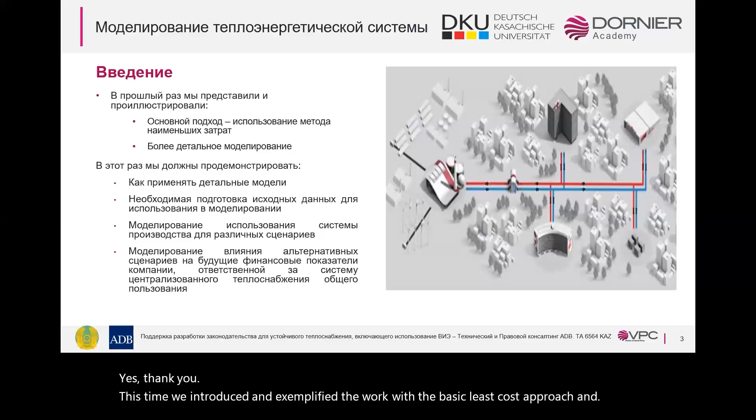Yes, thank you. Last time we introduced and exemplified the work with the basic least cost approach and showed a little bit more detailed simulation models too.

Today, we are going to go a little bit deeper into modeling of heat system and with focus on long-term planning, not for daily operation. That's important.

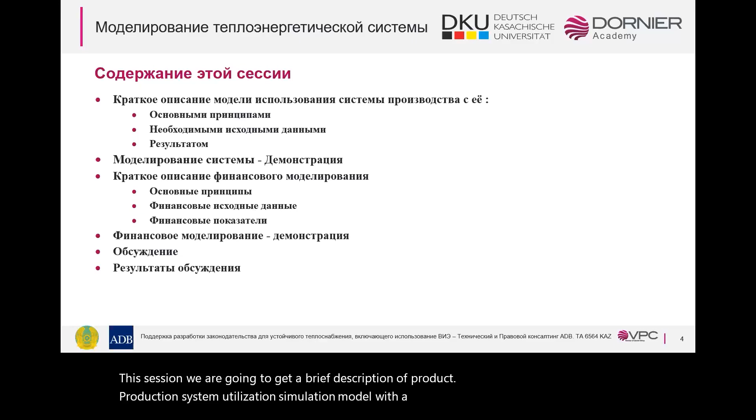So, this session, we are going to get a brief description of production system utilization simulation model with the basic principles, the necessary input and the output. We're also going to have a brief description of financial simulations, basic principles, financial input and financial performance.

After that, we're going to have a discussion as yesterday. And then if anyone wants, we will try to have a little demonstration too.

If we start with a production system utilization model, the utilization principle is that the units should operate in merit order. Then we are going to do a stepwise simulation.

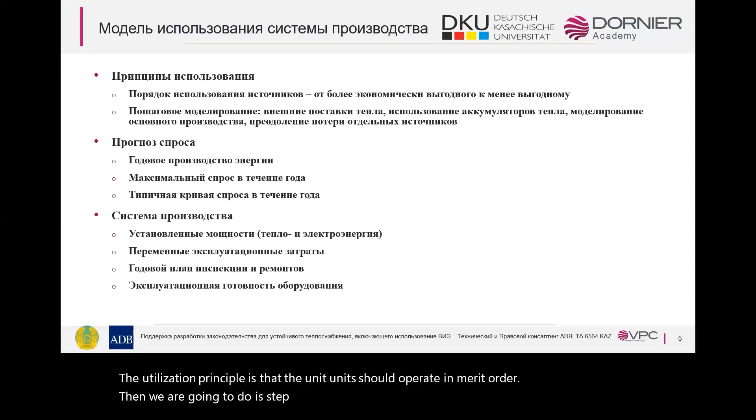And if we go to the input, we have two things: the demand and the supply. For the demand, we need a forecast of the annual energy, annual maximum demand, and the typical annual demand curve. When it comes to the production system, we need to have all installed capacities, of course, both for heat and electricity. We need to have all the efficiencies and so on, which is connected to these units.

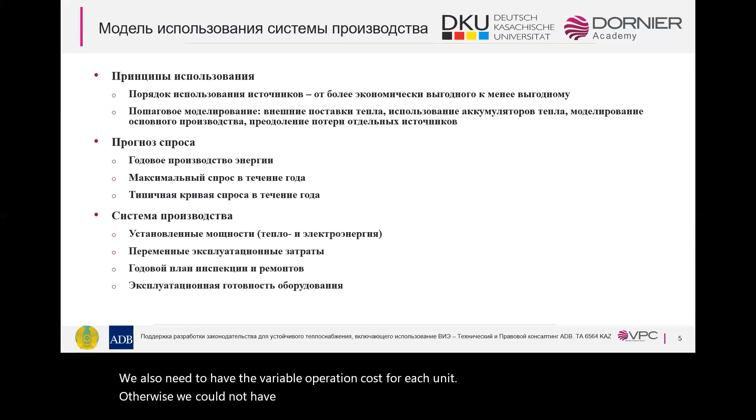We also need to have the variable operation cost for each unit. Otherwise, we could not have them in merit order. We should have an annual revision plan for the units for each one of them, and of course, the expected availability for those units.

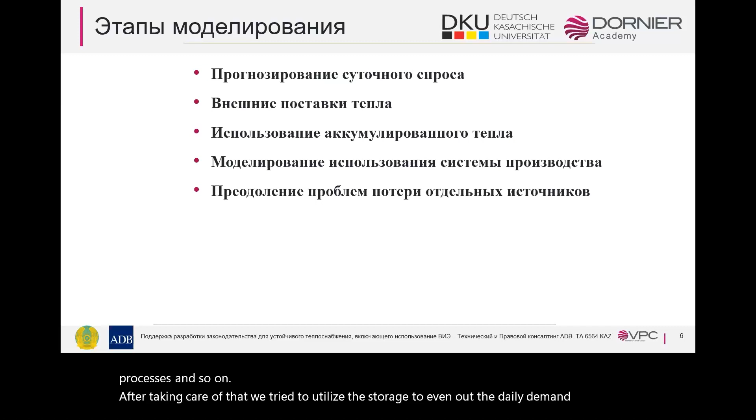Then we come to the simulation steps, and we start with a forecasted daily demand. We have the external heat deliveries, which is waste heat from industrial processes and so on. After taking care of that, we try to utilize the storage to even out the daily demand as much as possible. Then we simulate the production system utilization.

We make a preliminary simulation, and then we treat the unplanned unavailabilities.

When it comes to external heat deliveries, we usually do it very simply. We start with a daily demand curve, the daily demand, and reduce it with the external supply. Then we have the remaining demand to be covered by our system.

The storage is a special thing. You can use it in many ways. You can use it as spare capacity, of course, that's usual. But the main thing we have it for is to try to even out the demand between different days.

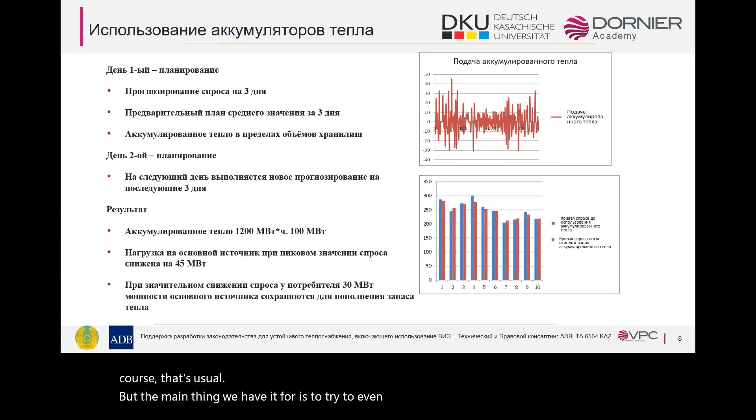The usual thing is that we make a forecast a few days ahead. In this case, we use 3 days. Then we plan for this demand as it's expected to occur over those days, the average of these 3 days. If the actual demand is higher than that, we take out energy from the storage. If it's lower, we add energy to the storage. Then we check if the storage is within its limits, of course. Then we come to day 2, we make a new plan with a new 3-day forecast, and so on.

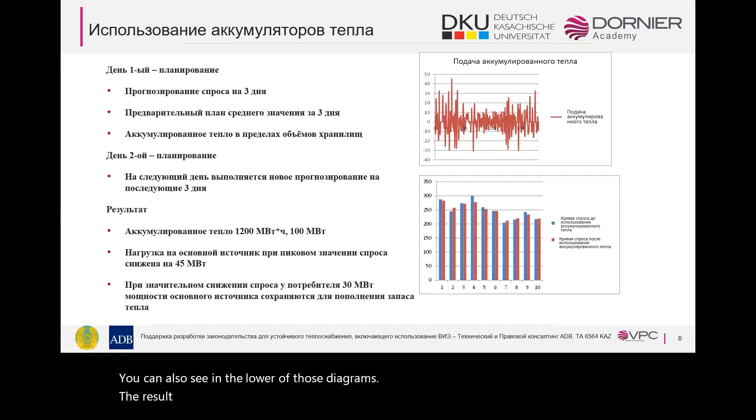In this example, as you have in the diagrams, you can see how the storage is used. You can also see in the lower diagram the result, the outcome, and the peak is reduced by 45 megawatts, and the lowest demand is increased by 30 megawatts. Remember, this is just an example.

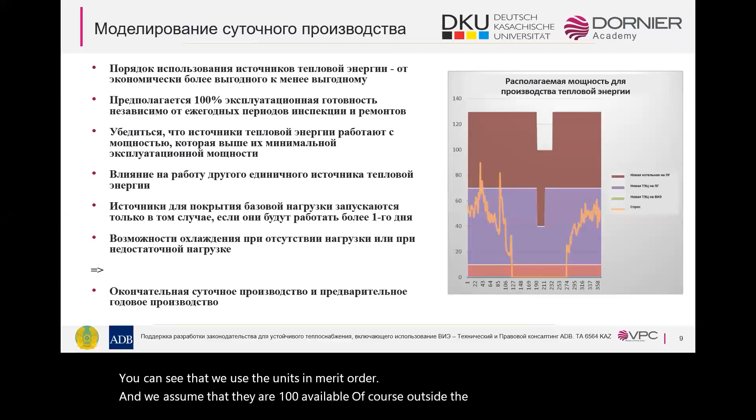When it comes to the daily production, you can see that we use the units in merit order, and we assume that they are 100% available, of course, outside the revision periods. If you look at the diagram to the right, you can see we have added the units from the bottom, and we have taken away the annual revision periods.

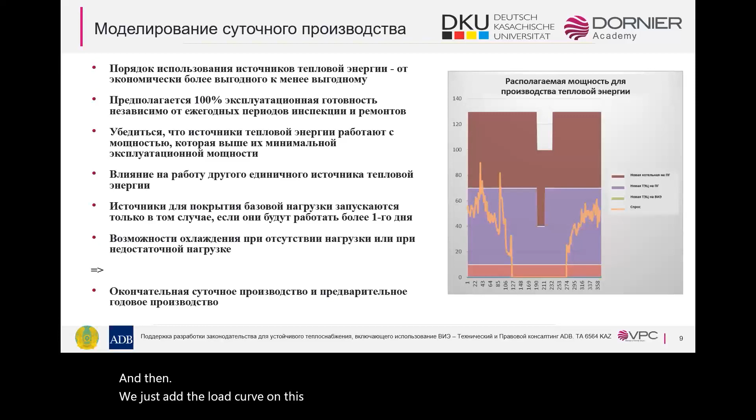Then we just add the load curve on this diagram, and then we get the daily production in principle. This is the preliminary, very preliminary thing.

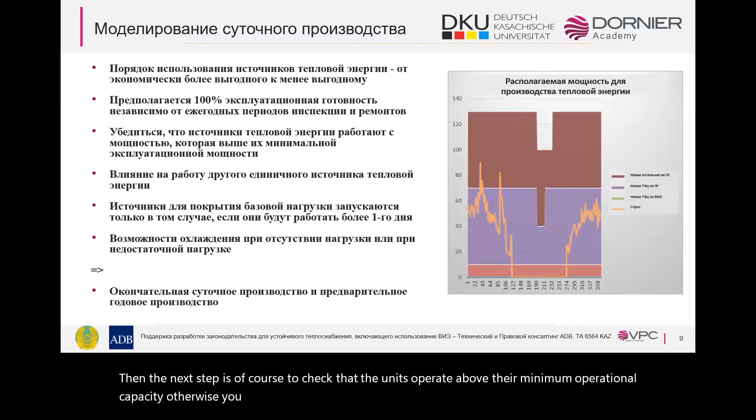Then the next step is, of course, to check that the units operate above their minimum operational capacity. Otherwise, you can't operate them. We also have to check if these units are dependent on operation in another unit, and that could be a flue gas condenser, of course. The flue gas condenser is, of course, dependent on the unit which it gets the flue gas from being in operation.

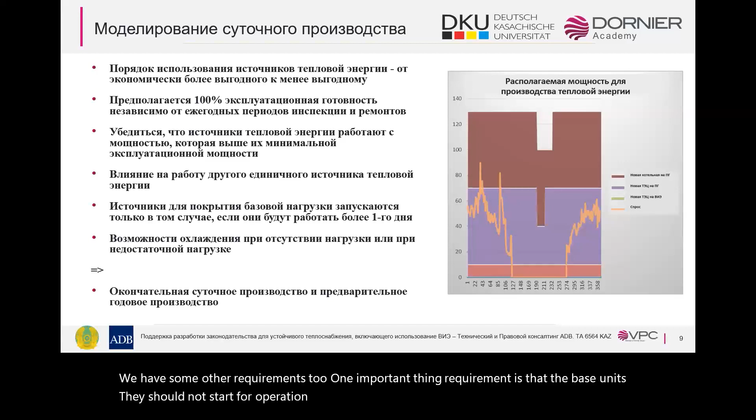We have some other requirements too. One important requirement is that the base units should not start for operation just one day or a few hours or something like that, because it takes too much time to start them and it's too costly to start them. You can also keep some type of units in operation by cooling away the heat, if that's necessary to keep it in operation.

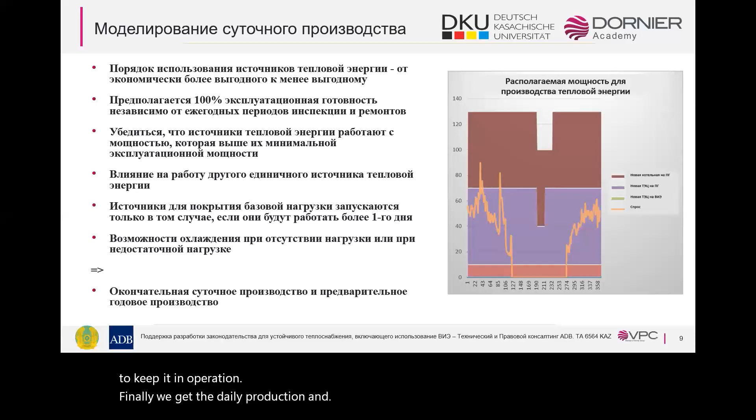Finally, we get the daily production, and we do that for every day and for every year of the simulation period. Usually we simulate 20 to 40 years.

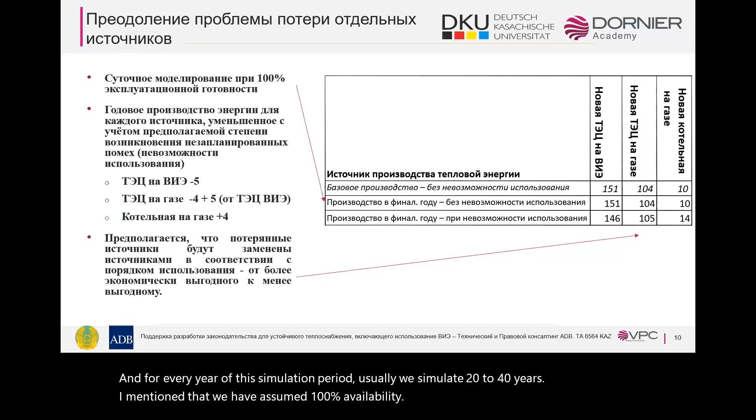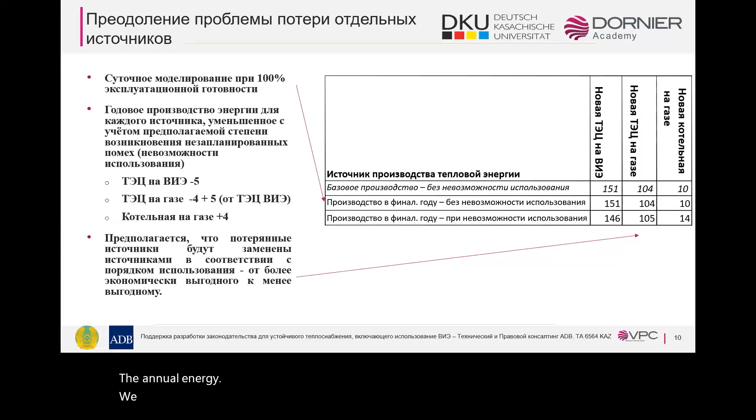I mentioned that we assumed 100% availability outside the revision periods. If you go to the second row in the table, you can see the preliminary production there. Then we should take away the annual energy that we assume is lost depending on unavailabilities, unplanned unavailabilities. In this case, you can see the CHP on renewable fuels, which we have in the table. Preliminary, we had 151 gigawatt hours during a year, and taking away disturbances and so on, we will end up at 146.

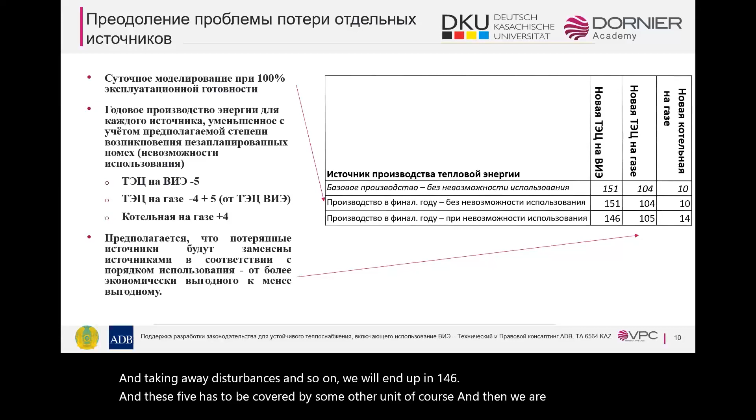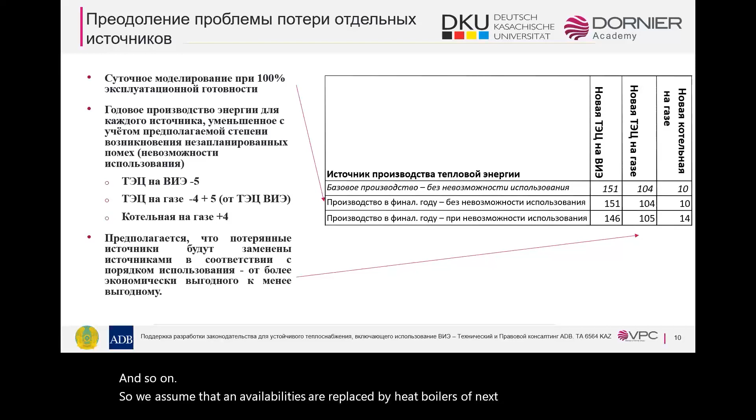And these 5 have to be covered by some other unit, of course, and then we are moving that to the next one in the merit order step. For the next one, we get 5 more to produce, and we lose 4 dependent on unavailabilities in that unit, and so on. So we assume that unavailabilities are replaced by heat boilers of the next step in the merit order. This is, of course, only done on an annual basis.

We should look a little at the input sheets, or at the input. We have a demand forecast, and that should be annual energy, annual maximum demand, under what we call normal conditions. We should have an annual demand curve, and we should use a curve with typical daily values. We use the same curve for all the years; we just adjust it to the annual energy and the annual maximum demand.

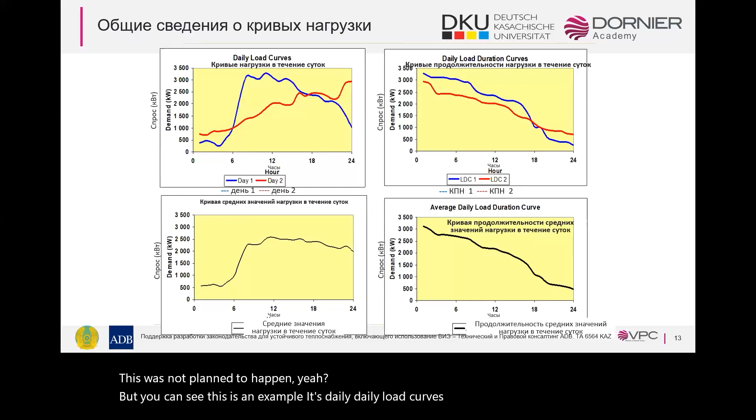We can simulate for normal years, warm years, or cold years if we want. We go to the problem with the daily load curve. Here's something, this was not planned to happen, but you can see this is an example. It's daily load curves, this taken from electricity, but it's the same principle. You see the first diagram, we have two daily load curves. To the right, we have the load duration curves for those two.

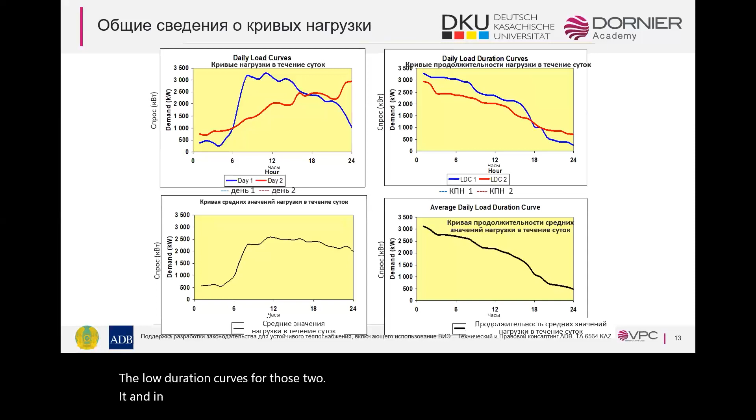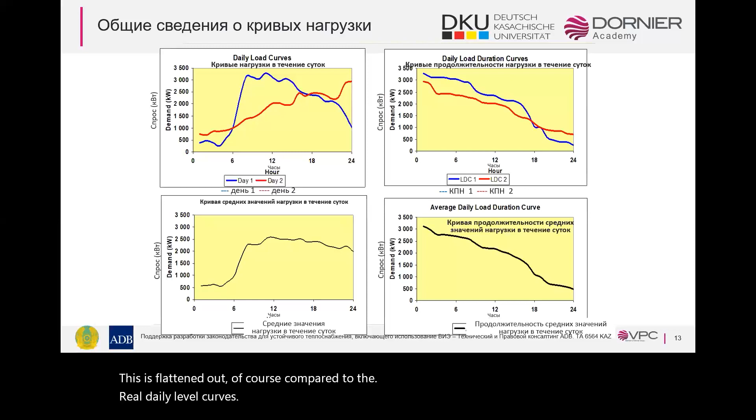And in the bottom left, we have an average curve of those two daily load curves. As you can see, this is flattened out compared to the real daily load curves.

If we go to the diagram on the right in the bottom, we have the average of the daily load duration curves. This tells us a lot about the typical demand levels, the expected levels, the differences between max and mean, and so on. But it doesn't say anything about when the different levels occur.

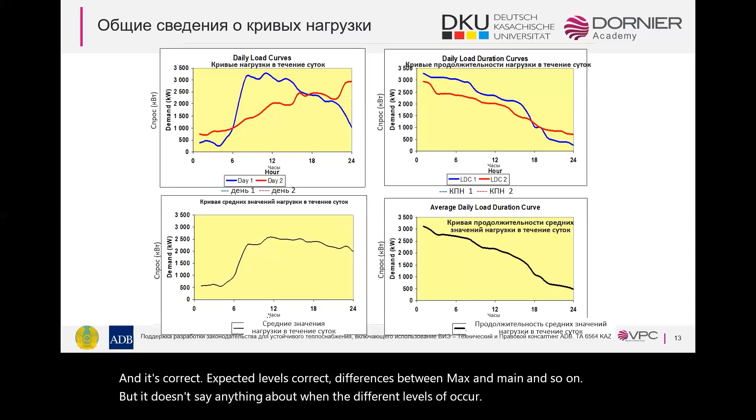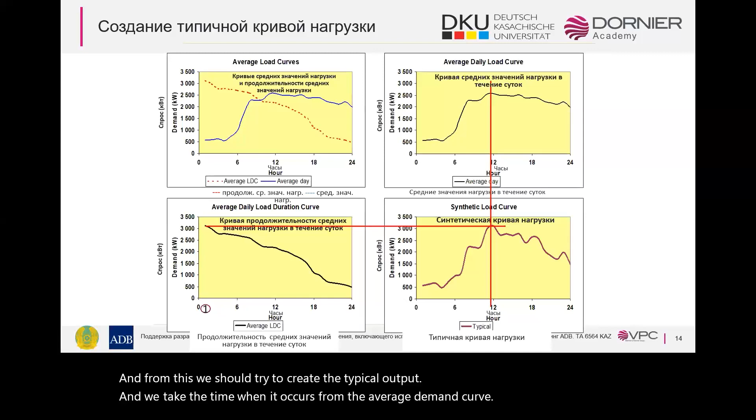Instead, we look at this. Here we have the average load curve on top to the right, and we have the average load duration curve in the bottom to the left. From these, we should try to create a typical load curve. We take the time when it occurs from the average demand curve, and we take the value from the average load duration curve, and by that get a typical maximum demand at the time when it's expected to occur.

And then we do the same for every hour during the day, or every hour during a year, and so on. So the curve to the right in the bottom shows a typical load curve, what we call a typical load curve.

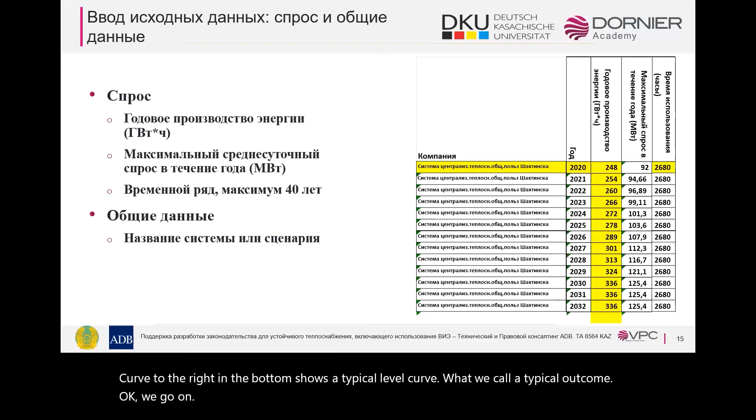Okay, we go on. We come to the demand. We should have a time series for all the time, and you can see here in the diagram we have the annual energy in the yellow column. We have the annual maximum demand, and we have the annual utilization, assumed utilization time too. We also had the name of the scenario and so on in this sheet.

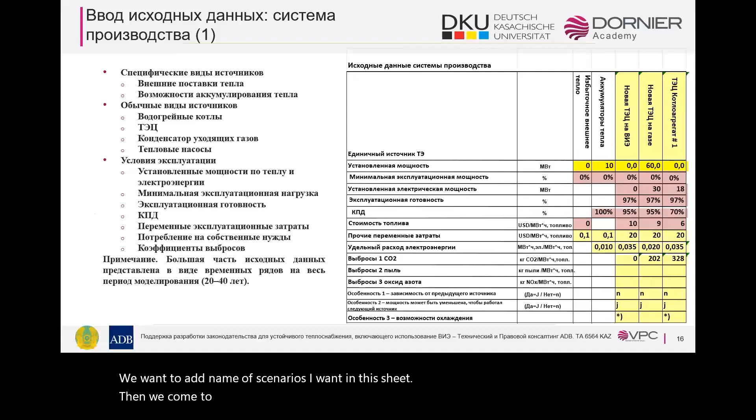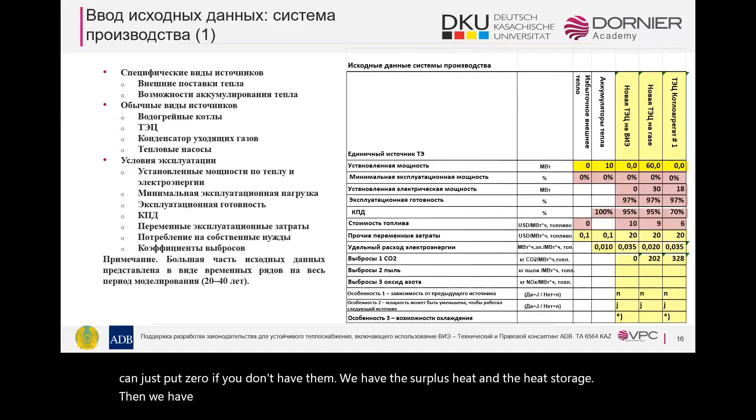Then we come to the production system. We can say we have first the units. You can see we have two types of locked units, which you can't change. You can just put 0 if you don't have them. We have the surplus heat and the heat storage. Then we have more general types of supply units: heat boilers, CHP, flue gas condenser, heat pumps, and so on. You can see this on top in the table.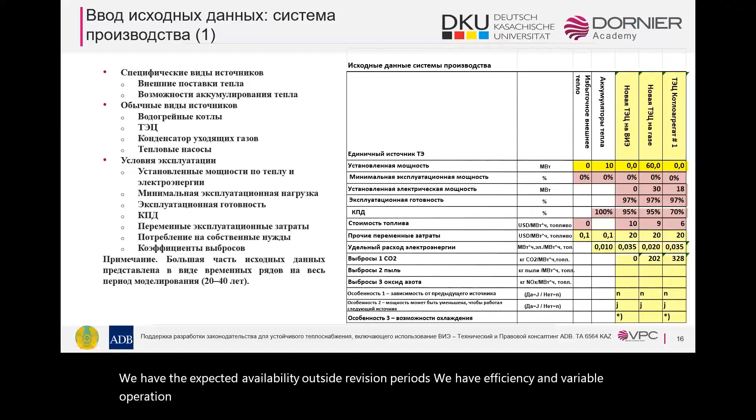Then we come to a lot of, what you'd say, operating conditions. We have the installed capacities for each one, heat and electricity. We have the minimum operational load, usually in percent. We have the expected availability outside revision periods. We have efficiency and variable operation cost, and so on, emission coefficients also. Most of this input is given as time series, but not all of them. We have a little bit more input for the generation, for the production system.

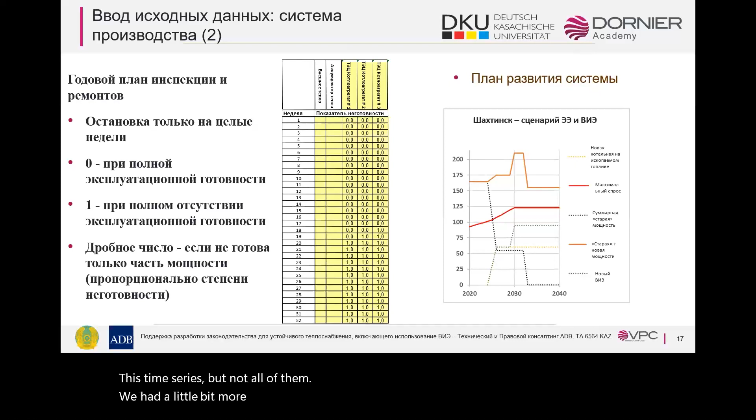We have the annual revision plan, which is rather important. You can see that in the first table, where 0 means that the unit is fully available, and 1 means that it's in revision, not available at all. This is done for whole weeks only.

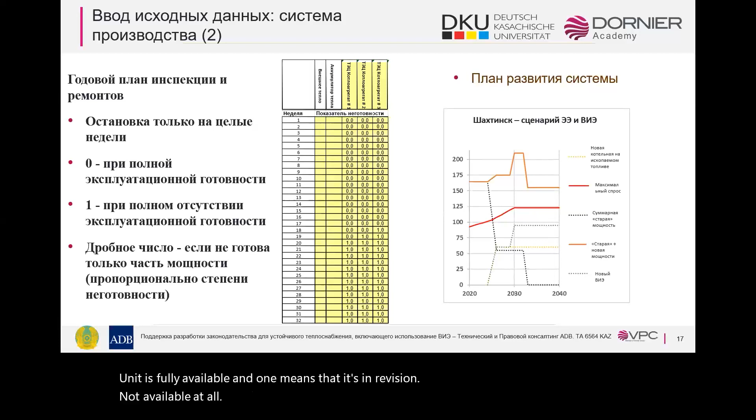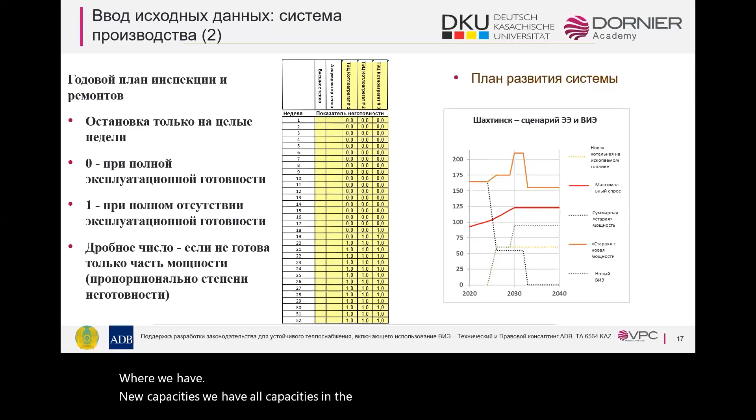We also have a system development plan, which is exemplified in the diagram to the right, where we have new capacities. We have all capacities in the system. You see when the line goes down, then we are reducing the capacity, taking away, retiring old units and so on. And we have increasing, and that's new units. That's what it describes.

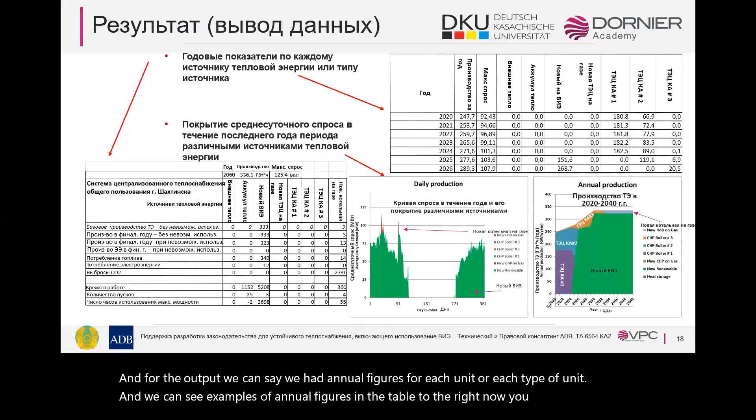Then we come to the output. For the output, we can say we have annual figures for each unit or each type of units. We can see examples of annual figures in the table to the right. There you have them year by year.

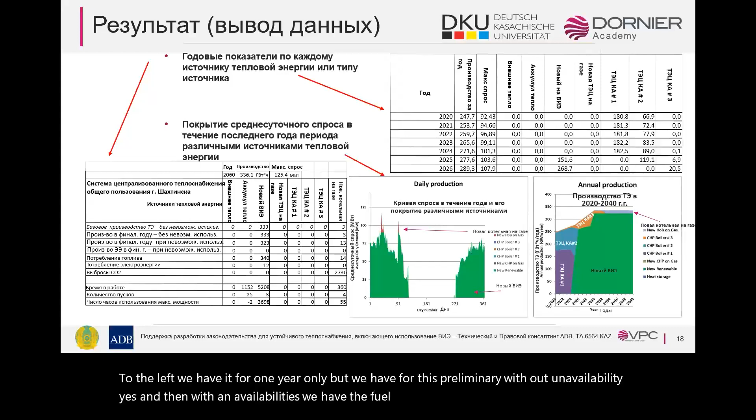And if you go to the table to the left, we have it for one year only, but there we have this preliminary without unavailabilities, and then with unavailabilities. We have the fuel consumption, electricity consumption, CO2 emissions, and so on. Number of starts and a lot of those things.

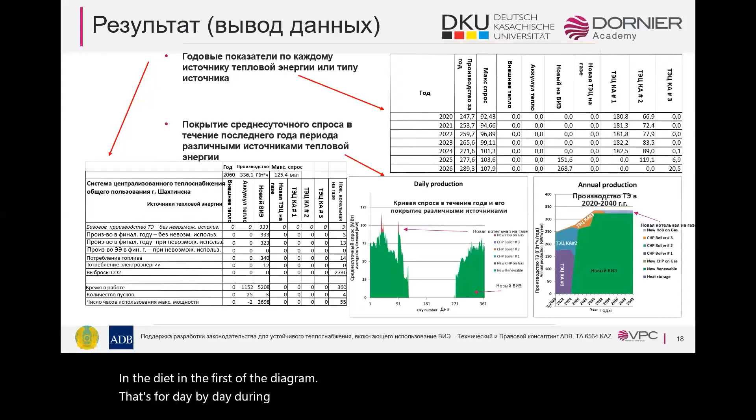You can also see the daily production plan in the first diagram. That's for day by day during a year. And to the right, the diagram shows the annual development year by year, and the annual production for each unit.

Yes, then we are going to operate this model. We have a very simple manual to operate it. It's 8 steps, and that's rather easy.

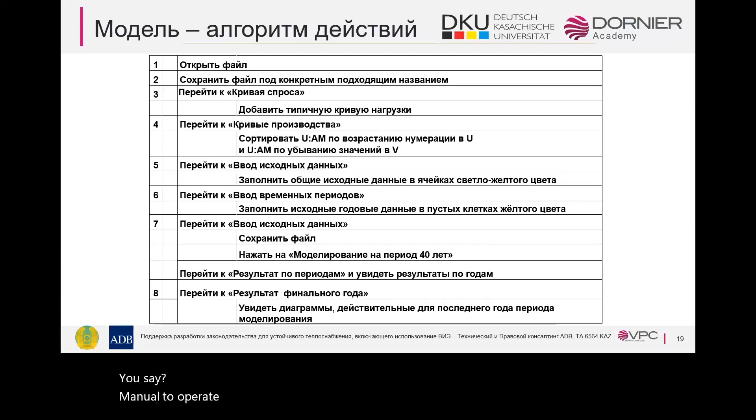If you want to, we should make a demonstration example after the discussion. And we are going to do 2 simulations.

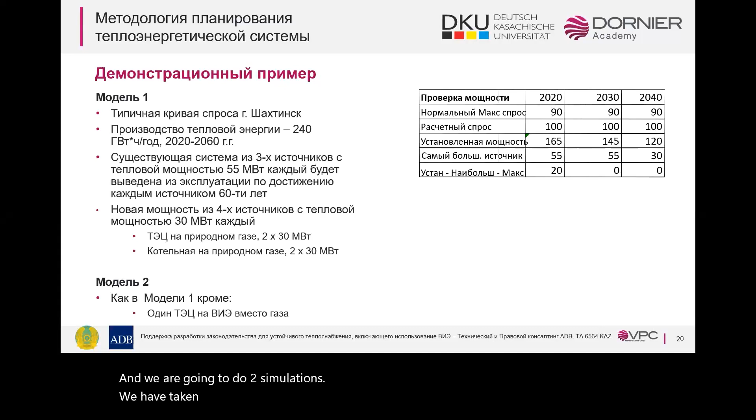We have taken the demand curve from Shakhtinsk, used in both simulations. We have a constant energy demand of 240 gigawatt hours per year.

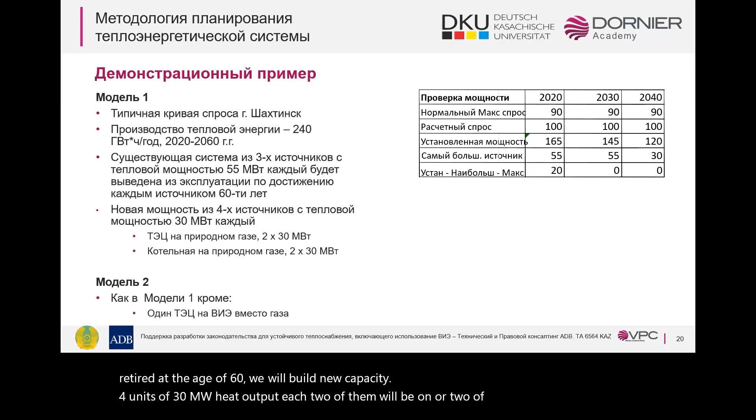We have the existing system, and we assume it's 3 units of 55 megawatts each, and they will be retired at the age of 60. We will build new capacity, 4 units of 30 megawatt heat output each. 2 of them will be new CHP on natural gas, and 2 will be heat-only boilers on natural gas.

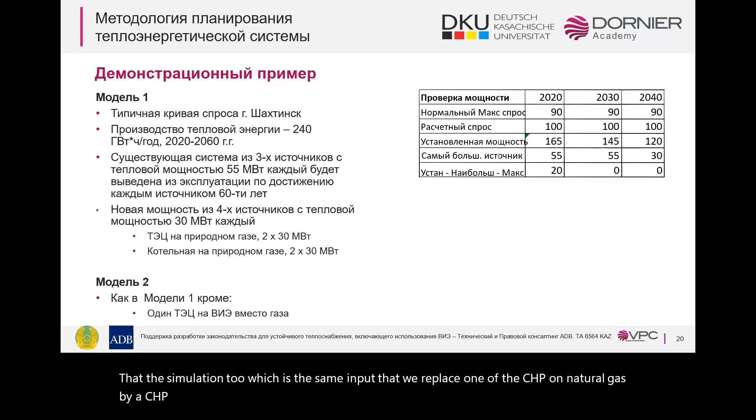Then we have simulation 2, which is the same input, but we replace one of the CHP on natural gas with a CHP on renewable instead. You can see the main data to the right.

Okay, we go further on with financial simulation. For financial simulation, usually you create some type of base scenario, often also called business as usual. You do as you always try to do. Anyhow, you create a base scenario. You create forecasts for sales, production, investment, for the price development of fuels, development of other costs.

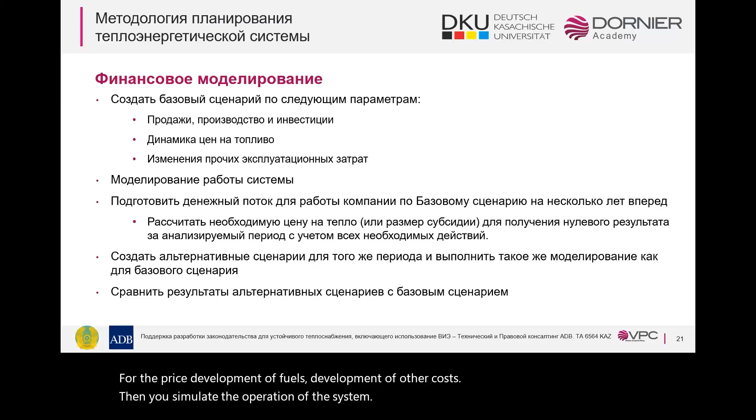Then you simulate the operation of the system, that's what we described before. After that, you prepare a cash flow for operation of the company for the base scenario several years ahead. Then you can start your work.

For instance, in many places, you calculate the necessary heat price to get a 0 result for the analyzed period. And that's often an input to what you say to authorities and other. Then you should take all necessary actions into consideration, as for instance, if you have to replace existing units, you have to take the cost of the new one into consideration.

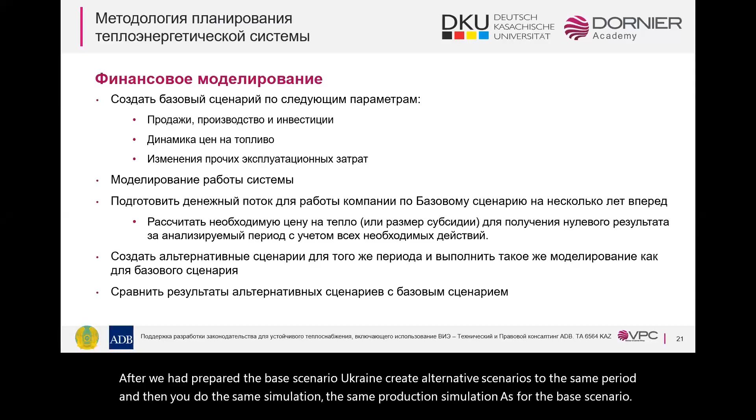After you had prepared the base scenario, you can create alternative scenarios for the same period, and then you do the same simulation, the same production simulation as for the base scenario. Finally, you compare the outcome of the financial simulation for the alternative scenarios with the base scenario.

We can look at an example. We have a base scenario that includes expansion and reduction of losses and so on. We also have an energy efficiency and renewable scenario. We have the same customers as in base, but we make savings on customer side. We use renewable fuels instead of fossil fuels when we replace the old units.

Those things are most used for the technical simulation. Then we come to the financial part. We take the input from the current annual report. We have current income, current variable cost, current fixed cost. And then we make some assumptions. One usual assumption is that we have constant real prices on sales and purchases during the whole period.

Then we make some simulations. You can do what we usually call goal seeking. You can calculate the necessary price to get a zero result, either only for 1 year, and in this case we have exemplified by 2019, or you can calculate the price that is necessary to get a zero result for the whole 40-year period using a discount rate and taking necessary investments into consideration and so on. You can also use it for sensitivity analysis, for instance, variations in the CO2 trading price.

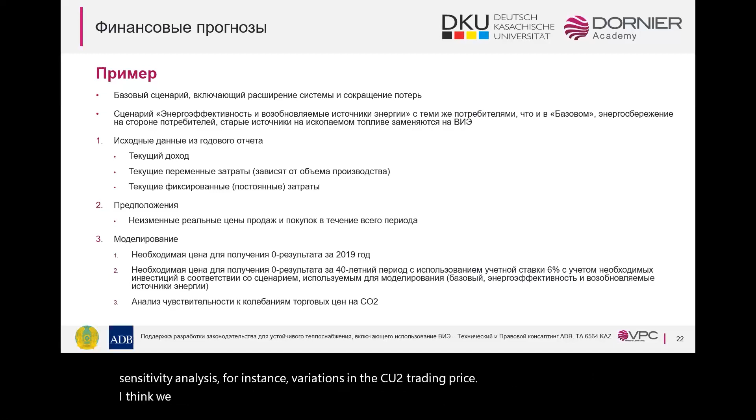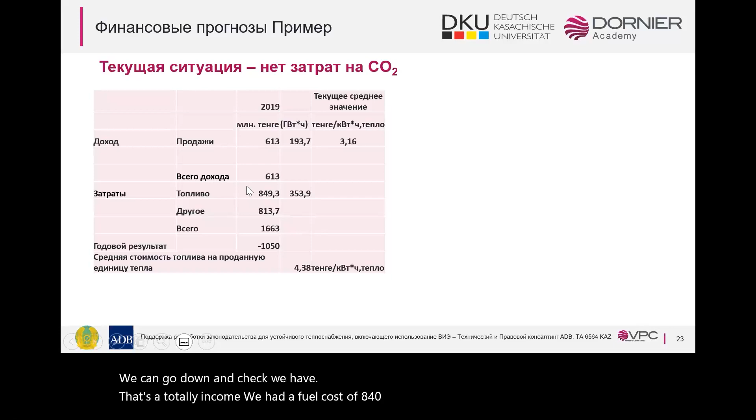I think we should start with the necessary price. Okay, here we have the basis. We have the annual income of 613 million tenge. We can go down and check. That's a total income. We have a fuel cost of 849 million tenge, and we have other cost of 813 million tenge. The total of that gives a loss of 1 billion tenge.

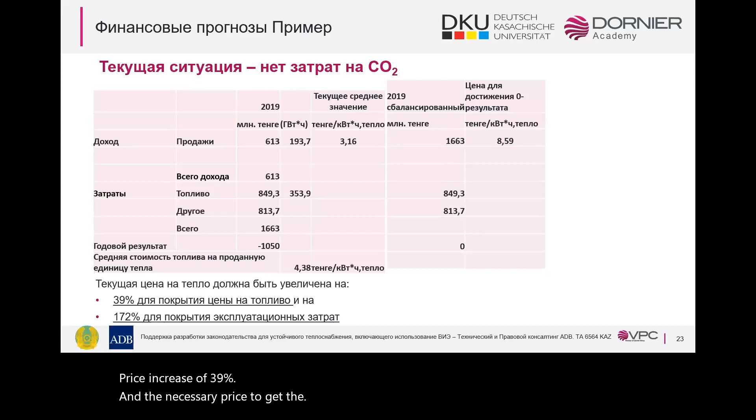The current price is 3.16, and the necessary price to get the coverage of the fuels would be 4.38, which is a price increase of 39%. And the necessary price to get the zero result for the company to cover all the costs means that we have to increase the price by 172% and end up at 8.59.

This 8.59, then, it's only for that year, and that contains nothing about the replacement of units and so on in the future.

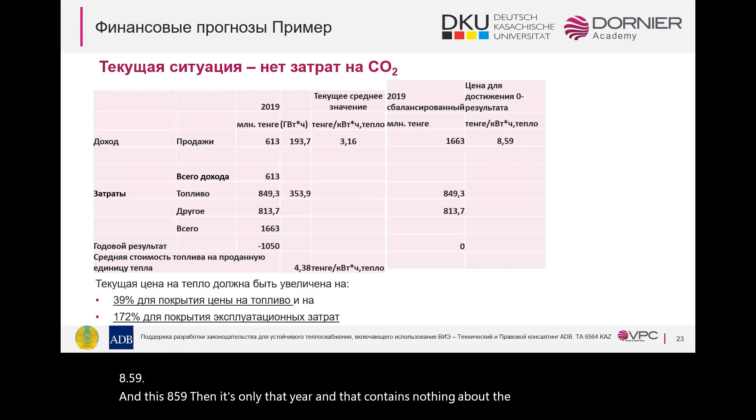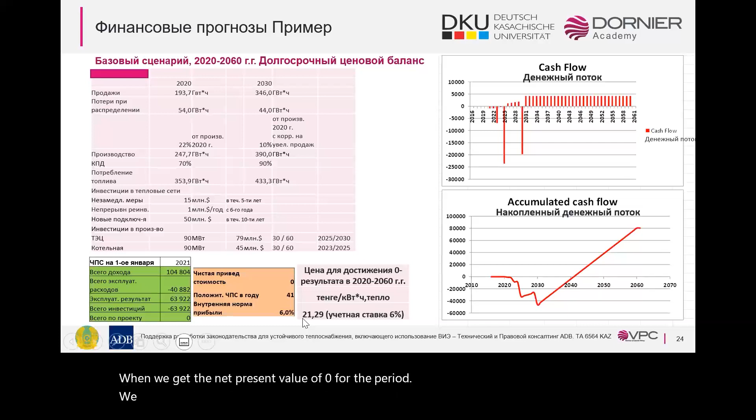If we instead should try to look for the whole period and get a long-term zero result, we have made the same calculations here. You can see we have the cash flow and so on. When we get the net present value of 0 for the period, we need a price of 21 tenge per kilowatt hour, and that's a rather heavy increase, 7 times or something like that.

And this was for the base case. If we instead go for the energy efficiency and renewable scenario, then we need a price increase, as you can see on the bottom here, of 22 tenge instead. It's roughly the same. And remember, this was just examples with rather uncertain input, but still.

We can also use it for sensitivity analysis. If we exemplify that by the CO2 trading price, you can see the current CO2 trading price in Kazakhstan is roughly $1 per ton.

We should remember today district heating is not included in this trading, but we can assume it. If we go for the European price, in January it was $22 per ton, the lowest since 2015. And if we go for the World Bank's forecast, it's $75 per ton for year 2030.

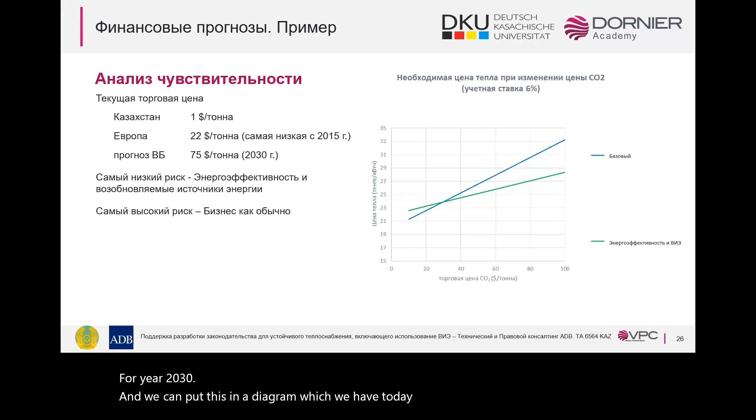We can put this in a diagram, which we have to the right, with the blue line and the green line. The blue line is for the base case development, and the green line is for the energy efficiency and renewable development. As you can see, the lowest risk is for the energy efficiency and renewable case, while the base case gives a higher risk for uncertainties.

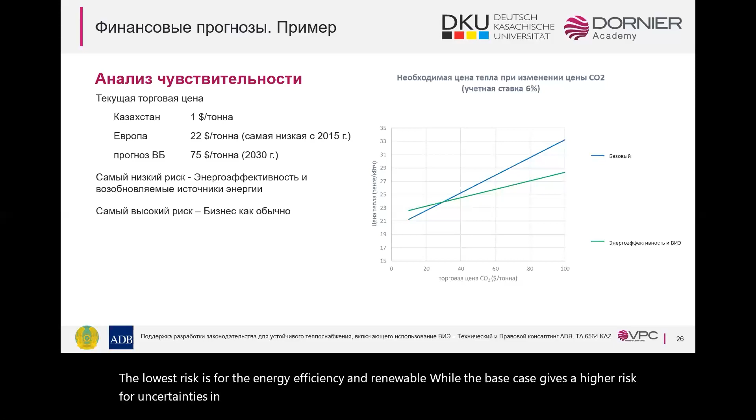Of course, you can do this for many more alternatives, like fuel price, investment cost, and so on.

For the demonstration example that we may show after the discussion, we will look at how to find the necessary subsidies and the necessary price without subsidies, using only the Kazakh CO2 trading price. Then we will change to the other prices.

This is the result, which we don't show at the moment.

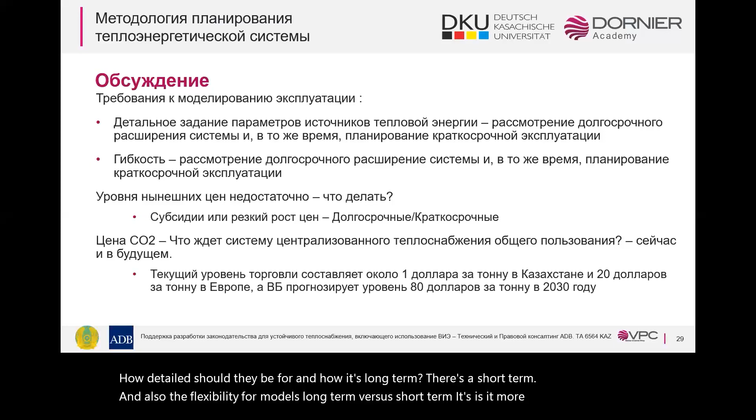I think I have said most of what I'm going to say, and we should have a discussion. I propose we discuss requirements of simulation models: how detailed should they be, and long-term versus short-term, including flexibility for models. Is it more important that it's very precise, or that it's flexible so you can change and make more simulations?

Another thing to discuss is the current price level. It's not enough in most cases. What to do? Should you work with subsidies or a heavy price increase? Should it be long-term or short-term?

Another thing is the CO2 cost. What to expect for the district heating system now and in the future?

Okay, thank you. That was what I planned to say at the moment.

Maybe Leonard, go one slide back and have the questions on the screen. Oh, sorry. That one, yes, I should just... Was this one? Yes, yeah. My Russian is not that good. That one, it's the one. Yes.

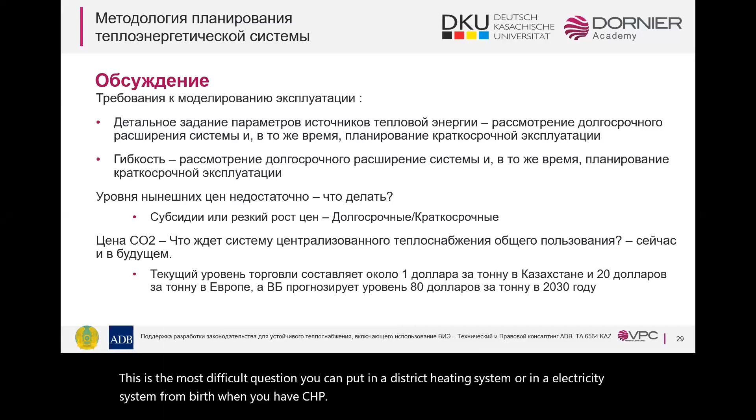This is the most difficult question you can put in a district heating system or an electricity system for both, when you have CHP, because it's the question of how to distribute the total cost on the different customer groups. Usually you look at the alternative cost for the customers to get either electricity or heat.

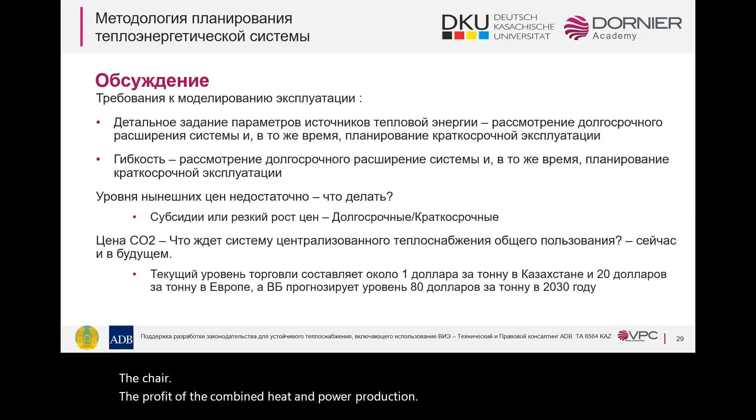You can use this type of model for checking how much it should be for the other one, under some assumptions. But you always have to make assumptions about how to distribute it. Should they pay the same per kilowatt hour, or should the electricity customers pay as if it was produced by condensing power plants? Or should the heat customers pay as if it was produced in heat-only boilers, or should they share the profit of the combined heat and power production? In most cases you try to share the profit somehow, but how to share it is a matter of philosophy. There's no real true answer on how to do that. But simulation models can help you calculate the value of such things.

You can simulate with and without CHP, both for the electricity system and for the district heating system, and then you can see the difference. But it's a really difficult question. Yes, I don't think I have much more to say.

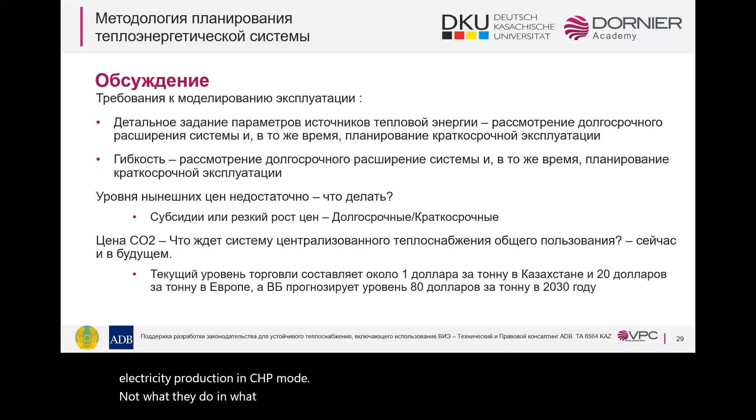Yes, in this case, when I made the simulations, I used the CHP as CHP. So I also got their electricity production in CHP mode, not what they would do in condensing mode. So I got that electricity, and when I did the financial calculation, I assumed I had a certain income from this electricity sales too. I had an electricity price, the kind of current one, the thing I showed the result from.

No, I mean the price was the current electricity price I assumed would be the income. It was not the real price, it was just an assumed price that I put in. But we can use the real price, the current price and so on.

You should remember that when I mentioned Shakhtinsk, it was just an example. I used the load curve, the original production units, and the losses in the network. But everything about the future is assumptions made by me, and in this case it's just to show an example, not to give the correct values for Shakhtinsk. You should remember that.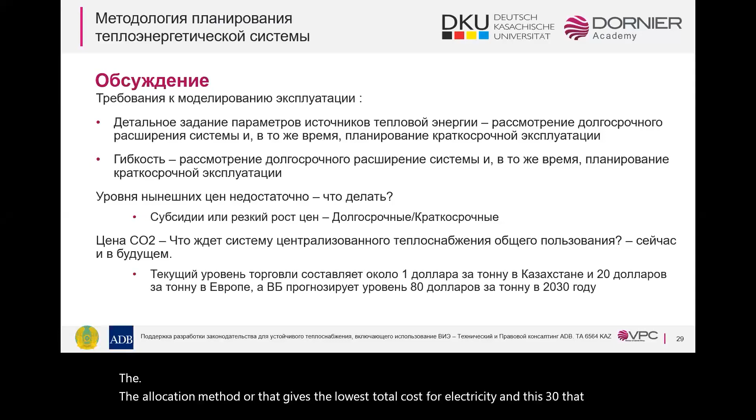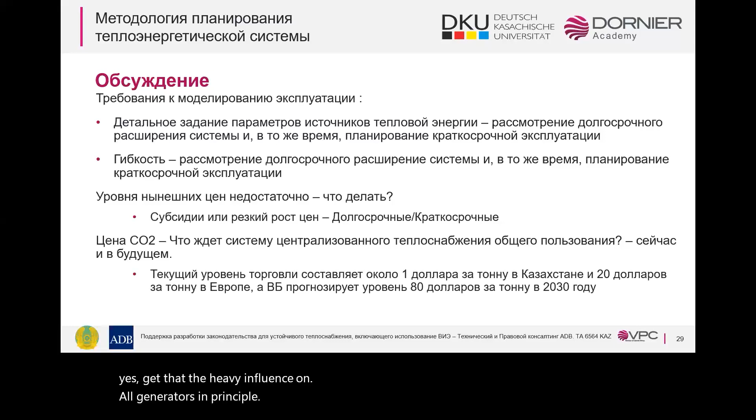Yes, first of all, I would say, in the ideal world, the allocation method ought to give the lowest total cost for electricity and district heating. That's the method that ought to be used. But the world is not always ideal, so it's done in some other ways. If we go to Europe, the electricity pool, the power pools where you exchange electricity, have a pricing that influences all generators in Europe in principle. That is the one that gives the income to the CHP owners, and what they don't get from electricity production, they will have to take from the heat customers. So that's real life. Today that's not a big problem because we have high electricity prices, so it's not a big problem for the heat companies. But it's not the ideal world.

But there is another aspect of it, which is that in Europe, in several countries, there is a support scheme for electricity from CHP.

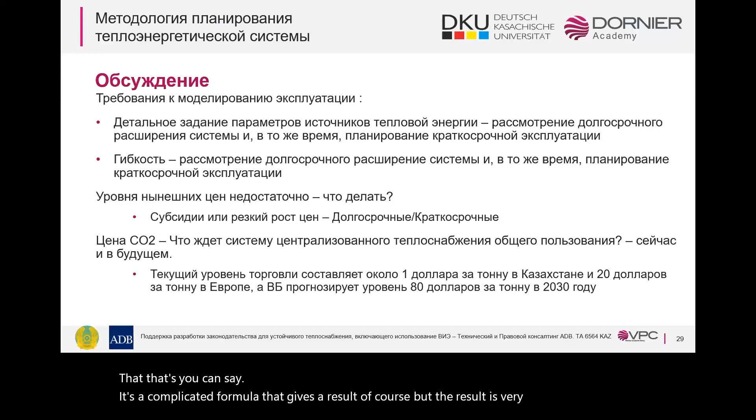But I mean, a simulation model — you can say it's a complicated formula that gives a result, of course, but the result is very dependent on what you put into it.

And it cannot calculate everything. It can calculate money upwards and down, it can calculate energy upwards and down, but a model is mainly — or you should say it this way — a simplified picture of reality.

And you should remember it's simplified. It's not the reality. But it reacts in a way that you have put into the model, and usually that's the decision.

Yes, usually it acts like most decision makers. So if the price goes up, you...

...use a little less, or try to find other ways to use it. But you can use it as a tool for calculations — you can't expect the model to give all the answers.

Correct. This is exactly it — it's a tool. It's a tool to see: if we assume this and this and this, with this set of assumptions, what will happen, or what does it look like?

What are the outcomes, for example, on price and so on, right? And then you change — ideally you keep some assumptions fixed, and then change one assumption, and see what impact that has on the outcome, and so on.

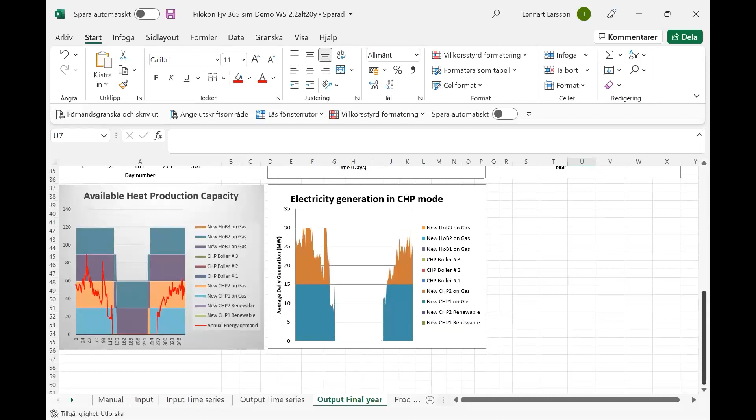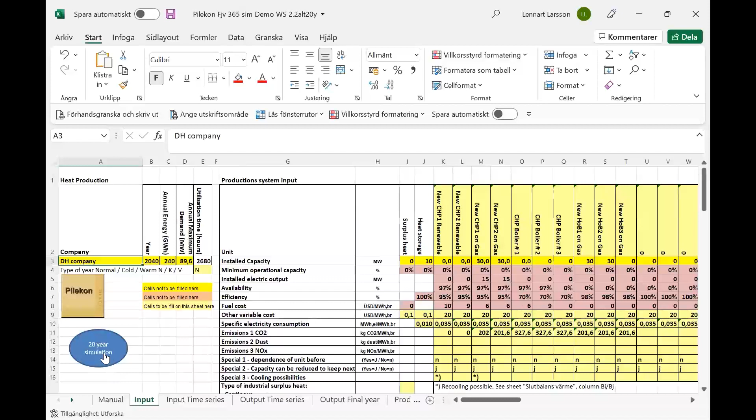That simulation I had made earlier, and now we are going to make a variation of that. Instead of this 30 megawatt new capacity on gas, we put a renewable of the same capacity. Then we should try to simulate this. I've changed the simulation period - it usually takes around 2 minutes if you simulate 40 years, now it takes half of that, I hope. I have made this very simple example just to show you that it's not hocus pocus, it's just calculations.

With a lot of assumptions, of course.

It will stop soon. Now if we go to the output for the final year instead, here we look at the same thing, and you can see - here we have, if we look at the annual production to the right, you see, if you remember the last picture, which you probably don't, this green area is from the new renewable CHP. We can look at the results of that instead. I think I have them here somewhere.

And the price has gone up a little bit, yes? Not very much here, not very much. Yes, this is the simulation example. I should just go down a little, and now I have to go to the English version.

This was the basic input, as you see, and here we have the outcome of it. I think you can see that different types of units have different production and so on. But if we go to the right, you can see the CO2 emissions. In the base case, we had...

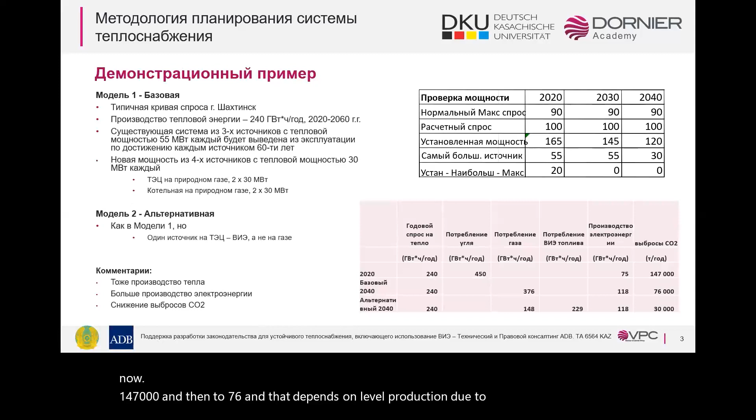Next. Here we can have it. Down to the right, we have the CO2 emissions going from original now 147,000, and then to 76. That depends on lower production due to more efficient distribution and by using gas instead of coal.

And then if we add one unit with renewable, a base unit, we reduce it down to 30,000. So this is valid for any type of emission and any type of cost, variable cost, and so on.

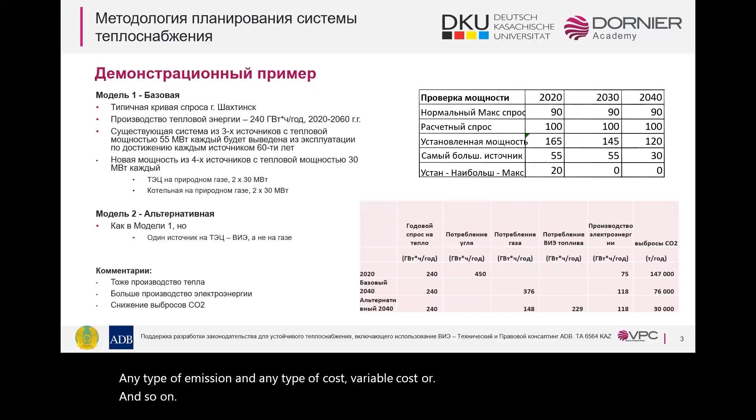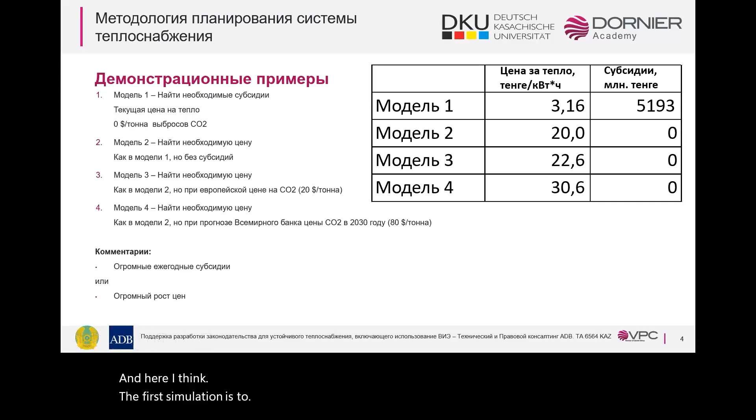So then this was just an example. Then maybe we should try to do something with financial simulations too. Here I think the first simulation is to calculate - yes, we use the current heat price and zero dollars per ton CO2 emissions, and we calculate the necessary subsidies. That was what I aimed to do at least. Let's see if we can do that.

And I should find an Excel file here somewhere. Not that one, not that one. Or yes, this one. Now we have the current situation, 2019.

We have the current price, 3.16, and we have no subsidies. If we add this, we get the following cash flow when we replace the units and so on. We get the accumulated cash flow. It's a catastrophe. We get the net present value in red, in the red box here. And of course, it's not possible to go on operating a company under these conditions. So we need to do something.

The first thing is to calculate how much subsidies we need annually. Then we do something that we call goal seeking, and we say that the net present value should be 0. We can make changes in the cell of annual subsidies.

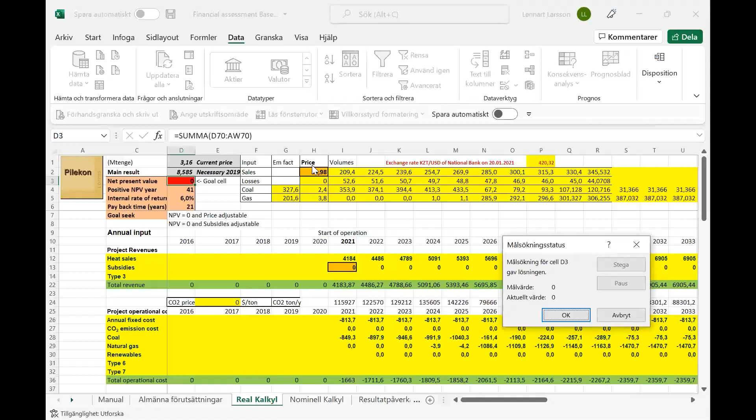We have still 0 in net present value, but this time we can adjust the price instead. Now it's operating, and here we can see to get a long-term balance and to cover the necessary investments, we need to have a price of 19.98, 20 tenge instead of 3.16, and that would probably be rather difficult to do.

And we can go on and do more variations, but I think this was what I would like to demonstrate now. You can calculate how much you need here, or you can make other assumptions. You can calculate the allowed coal price or allowed gas price or something like that.

Okay, then I think we should go back. Can you— yes, sorry. Can you wait 1 minute?

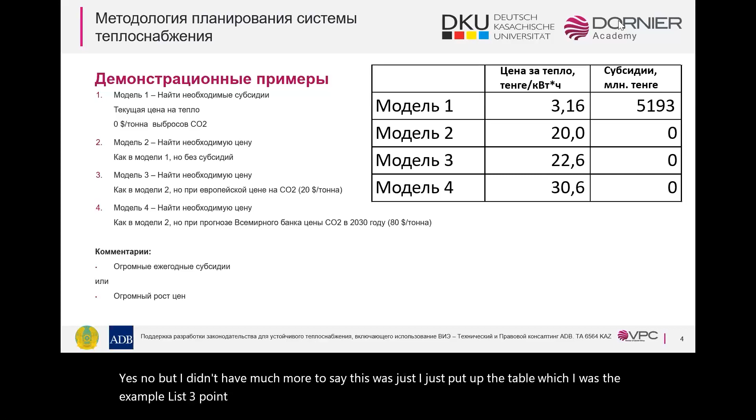This was— I just put up the table which shows the example, this 3.16 and 5193, or 20 and 0, with $0 per ton and so on. So it was just those things that I think was important to show.

Okay. So should we look at the survey now? We have maybe 7 minutes left. We should. Who put that up? Yeah. Dinner. Now it's time. There we go.

Okay, Lennart, should I help you? Maybe you can translate for me.

For the first question regarding the applicability of this presented methodology in Kazakhstan, the majority of respondents, 59%, said that yes, it is applicable, but it needs some substantial adaptation. 24% consider it applicable with no need for substantial adaptation. The rest, 16%, consider this presented modeling methodology unacceptable, and believe it's necessary to develop and approve a Kazakhstani methodology.